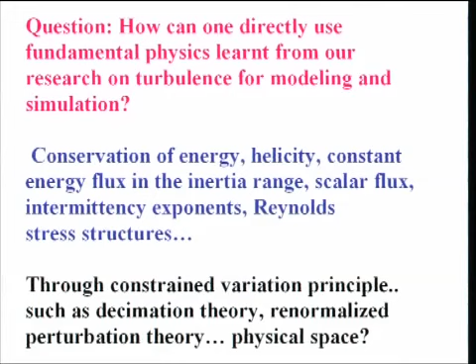In fact, we have done some work even with intermittent correction exponents. This year in Physics of Fluids, the first issue, I published a paper. Maybe some may not know that.

We constrain, in fact, the energy flux. We have constrained helicity flux. We also constrain the passive scalar. We also tried the intermittent exponents.

One example I can give you: for people doing large eddy simulation, they know that if you use a dissipative model, essentially you will not get the correlation very well. If you use the similarity model, you will not get the dissipation well. So in fact, you can do this type of constraint - for example, energy flux - to correct both of them.

So what I'm going to talk about today is another example: how you can use this constraint idea, learning from physics, to try to do this so-called multi-scale simulation. Nowadays people are talking about detached eddy simulation, RANS, and LES coupling.

So the problem here is that we all know that for large eddy simulation, resolution is a challenge. For example, near the wall, your resolution demand increases very fast as Reynolds number to the power 1.8, whereas outside it's relatively slow. Therefore, people propose to do RANS near the wall region and large eddy simulation outside. They need a coupling - that's the essential idea.

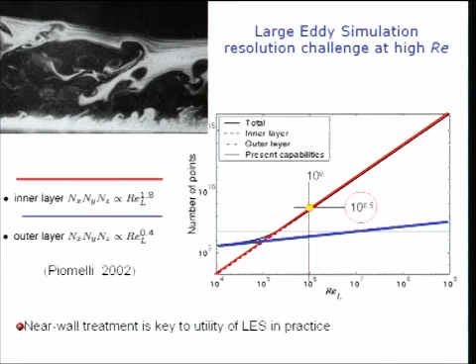Nowadays they're talking about using hybrid RANS and LES. In fact, for this kind of simulation, there's also a problem. We may be able to use this constraint idea to overcome it.

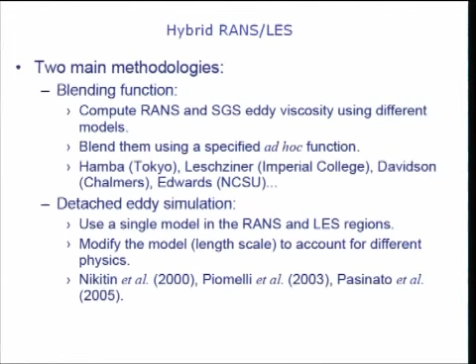The two main methods are this: blending methods, where you compute RANS and LES eddy viscosity with different models, then blend them using a specific ad hoc function - a lot of people have done this. And also another model is the so-called detached eddy simulation, which essentially solves one equation, but in different regions you use different coefficients and so on. That's essentially what's in the SA model.

To make a long story short, let me tell you that in fact there are problems for all these approaches. The major problem: if you look at the essential channel flow for detached eddy simulation mean velocity profile, with different resolutions you always see that you cannot really exactly catch the log law. This morning most people believe in the log law - maybe there's a power law as well, maybe that's the correct one.

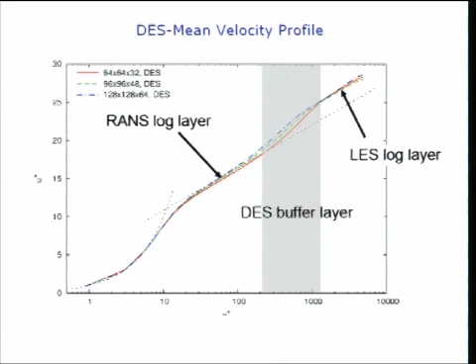Instead, you push the log law to some region here - you can see there's some 1 over k correction that gets pushed out. What is the problem with this? The problem is the following: large eddy simulation and RANS are based on opposite philosophy. The matching is problematic.

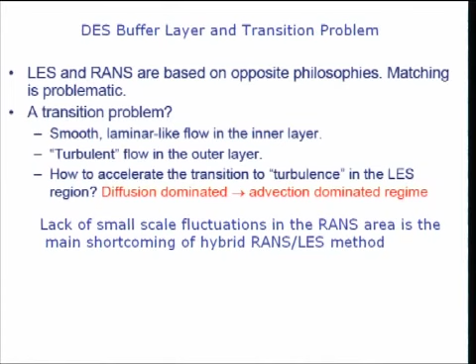Why is that the case? In the inner layer, essentially you're solving a RANS model, which is diffusive, whereas outside is essentially advection dominated. So essentially, lack of small-scale fluctuation in the RANS area is the main shortcoming for hybrid RANS and LES matching. You don't have small scale there, but outside you have small scale. You need to allow small scale to develop, then match outside - that's why you push your log layer profile outside. That's the whole problem, I believe.

So how do we overcome this? There's a possible solution for this. There's a group of them.

There's one approach by our colleague from University of Maryland, Ugo Piomelli, putting a forcing term in the interface, generating the fluctuation, so essentially you don't need a certain transition layer immediately generated. Of course, forcing also has problems because you don't know the statistics, and so you have to use white noise and so on.

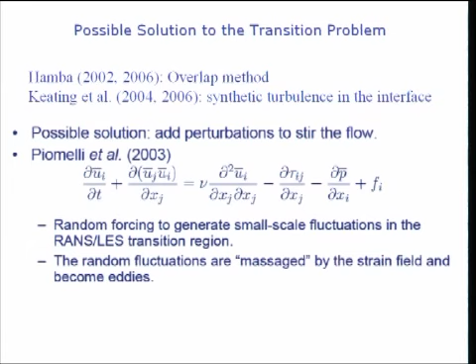So here is our approach. That essentially overcomes the problem pretty well for some cases.

Here's our approach: we promote the idea, why not constrain the Reynolds stress? So what we propose is the so-called Reynolds-stress-constrained large eddy simulation, RSC-LES. What we are doing is solving the whole domain with large eddy simulation, but we try to constrain it. So for this region, you are not doing free LES.

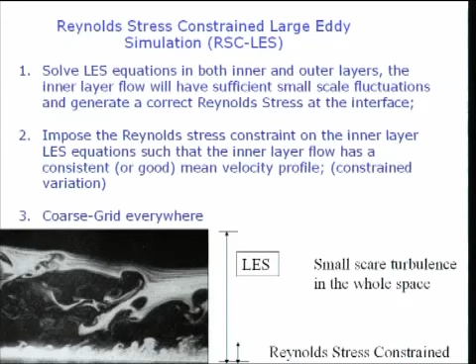What I'm going to say is we develop methods so that the LES method, or any model, can constrain particular underlying physics. So what do we say? In this case, we constrain the Reynolds stress. You constrain the Reynolds stress for LES in the inner layer. You can see the advantage.

Why is that? Because you get the whole range of fluctuation, but at the same time you have a split like detached eddy simulation. What's detached eddy simulation? Detached eddy simulation tells you that in your inner layer, your Reynolds stress is the solution. I certify that. So the bottom line, can you do that?

How do you do this? That's the idea, okay, let me tell you. Here's the idea: essentially you can write down the LES equation, then perform ensemble averaging, and you essentially see that this is a Reynolds equation. So comparing these two equations, you get an exact solution.

The Reynolds stress, this one is known - it's the Reynolds stress for LES. Then this is the subgrid stress, the ensemble average. You get that exactly. This is an exact relation.

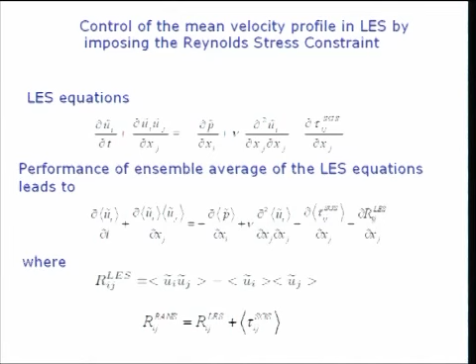Now what do you do with this? You just decompose your model equation into mean and fluctuation, the real tau ij, the stress. But therefore, essentially, the mean is known. Suppose this is a known quantity - suppose I give you the Reynolds stress, for example, from a K-epsilon model, an algebraic model, or an SA model.

Suppose you learn it from experiment, suppose you learn it from physics - now you know this physical quantity, then the mean quantity is known. We have developed a large eddy simulation such that as long as the mean is known, we can do the large eddy simulation.

But you need ensemble average - do you need it? That's for all LES, you need to do that anyhow. Right? You either do Lagrangian time averaging, or you do space averaging. We have done both of them - time and space. So that's the essential idea.

We have tried the algebraic model, K-epsilon model, and SA model. So for the fluctuation part, you can just go back to do the normal large eddy simulation with the dynamic Smagorinsky model and determine them.

For the interface, we can use the same approach as detached eddy simulation, or you can use an interface to separate inner and outer layer located at the beginning point of the log layer, such as where the Reynolds stress achieves its maximum. We've done this, so let me show you some of our simulation results.

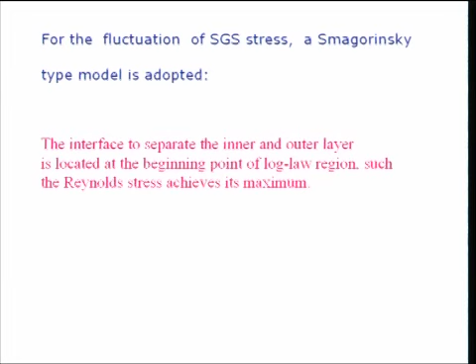That's the idea, I hope this idea is clear. The idea is to constrain your Reynolds stress and put it back into your LES simulation.

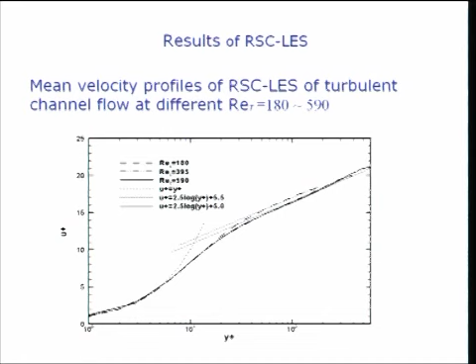Now let's see this - this is an exact comparison with DNS using our RSC-LES, with the coefficient here based on different Reynolds numbers, and people know that the adjustment is between 5.5 to 5.0. We compare them for different Reynolds numbers. This essentially is a DNS comparison.

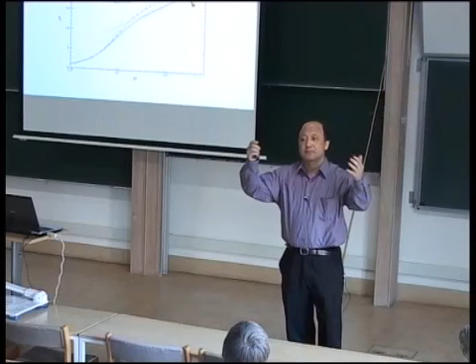It agrees quite well. Now let's compare with the detached eddy simulation - there are several curves here. Detached eddy simulation is this curve, and LES is just normal LES without constraint. This is a 64 by 64 by 64 simulation. The DNS was done with 256 by 256 by 256 - each direction reduced in size by 4 times.

You can see that the constrained LES matched to the log layer is quite well, for this particular Reynolds number. You can try again with 1,000 - you see again it matches quite well, and try 2,000, 1500 - that's the highest we can do using a small computer. I hope I can compare to our colleagues' higher Reynolds number simulations with this.

But it turns out to be quite good. The reason, as I said, is you don't have this push-out effect - you get both good parts. So the philosophy I'm promoting here essentially, when you do this kind of modeling, is a Germano identity - people know that through LES. This is a fundamental geometrical symmetry argument.

My personal feeling is that you have to add back so-called physical underlying constraints, which may help you overcome these kinds of problems. That's my philosophy here. Let's calculate the drag coefficients.

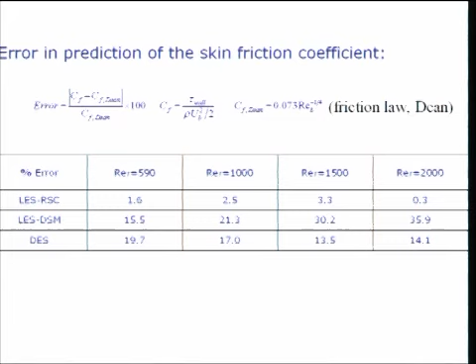This is a comparison of drag coefficients, comparing our model without a constraint, the dynamic Smagorinsky model, and DES with different Reynolds numbers. This calculation goes up to 2000. The drag coefficients, compared with Dean's friction law, show this model is not bad at all compared with others.

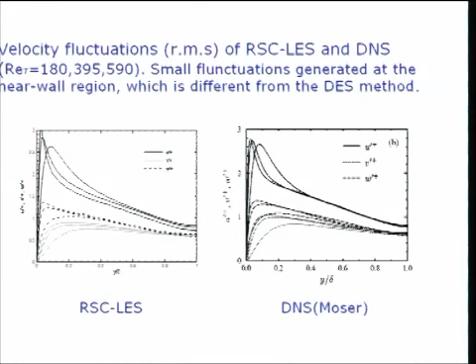Let's look at the comparison - the DES and our interface don't really change too much. We just assume there's a maximum stress. We also compare other Reynolds stress quantities with DNS data, and they compare very well. We also compare velocity fluctuations in different directions.

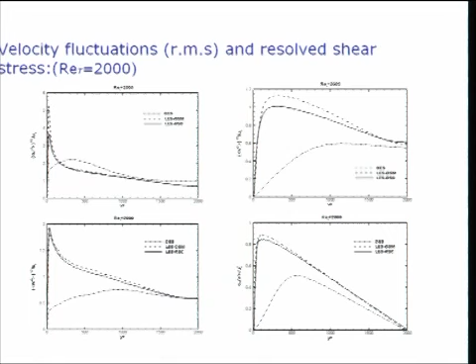This quantity shows the results for DES. Of course they cannot catch it, but our results compare quite well with the traditional dynamic Smagorinsky model for this part. Our mean velocity is much better in this case.

Also look at stream fluctuation - people have already published that. This is DES. You don't see small scale structures - you see a lot of larger scale in the inner layer, which in fact is not correct.

We compare - this is the result from the dynamic Smagorinsky model and our constraint model. They are all consistent.

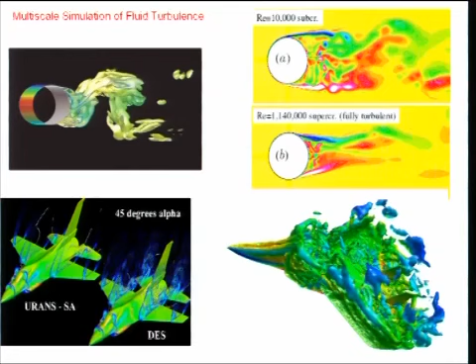We are working on trying to adapt this kind of model for complex geometries. Here is our conclusion. I'll leave some time for discussion.

RSC LES uses the same grid resolution as DES. The inner layer flow solved by RSC-LES possesses sufficient small scale fluctuations. The transition of the mean velocity profile from inner layer to outer layer is quite smooth. This method is simple and may improve DES and the forcing scheme.

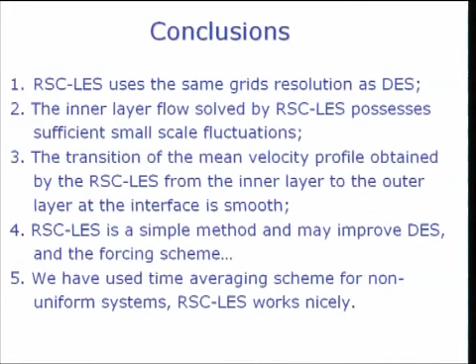We have tried time averaging and so on, and it turned out to work quite well. My conclusion is, when we do this kind of large eddy simulation or numerical modeling, I hope we can use this morning's talk - fundamental physics - and put it directly into our models. That's my hope. Thank you.

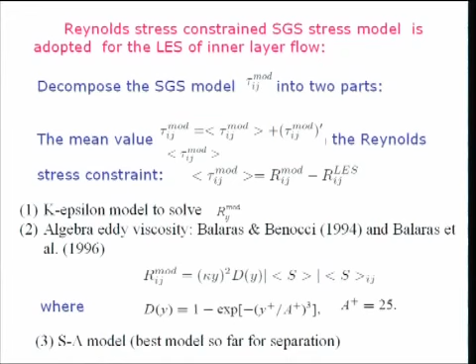If you look at this term for large eddy simulation, it's known. Essentially this term, because we want to constrain the average of your subgrid scale stress. But we don't know this quantity - however, this quantity is essentially given by the detached simulation.

You are using the SA model or an algebraic model. So what I say is, we put this term - you solve the Reynolds equation, then put it back to constrain your subgrid stress. So where we constrain the subgrid stress is the mean quantity. What exactly do you do to the LES?

What do you mean by constraint? So essentially, after that - I have U, V, W, so what do I do with that?

Essentially, if you know this mean quantity tau ij - because I separate this tau ij into mean and fluctuation parts - my mean is now known. Now I solve for fluctuation, only need to solve the fluctuation. I can solve the fluctuation using the dynamic Smagorinsky model.

I got the mean from your Reynolds. Okay, either you use SA model or whatever model you're going to provide, I still solve my fluctuation part, add them together to be my real stress. So now your mean quantity stress satisfies the Reynolds, your fluctuation is controlled by the dynamic Smagorinsky model.